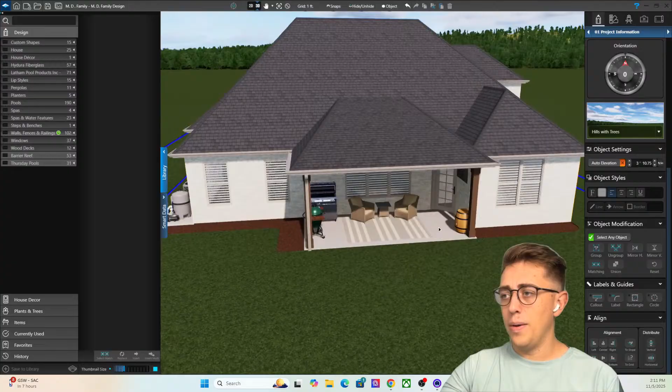So let's jump into it and I'll kind of show you what we have going on. So right here, immediately you can see is a big house. It's a very nice house. This is a project I'm doing for a family, and right now this is all that they have in their backyard space. It is a small, tiny patio, and they've got a nice, massive, big home.

This is the 3D view of our modeling software. I've duplicated the houses next to it to just kind of simulate the neighbors' houses.

So we're operating off of this idea of, okay, this is our client's home. These blue lines are the property line on the outside. The inside is not the minimum building setback, but it's a public utility and drainage easement. This means, especially inside of developments, you need to have a certain amount of green space in between properties so that water can effectively drain, and you're not just concreting the whole development and causing all of these water problems and drainage problems.

But there's plenty of green space to go around. The neighbor on their left has a full fence. The neighbor on their right does not. And that's going to be an important thing to note when we get to this design as well.

So before we get too far in, we're going to jump into our 2D plan here. And we're going to pull up our client overview, the Johnson's family. This isn't their actual name, but we're going to call them the Johnsons for now.

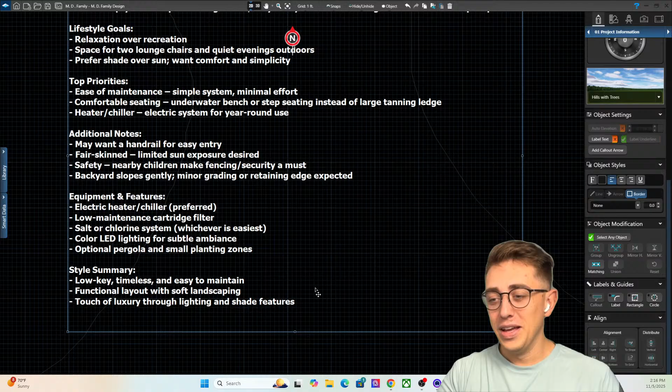Once again, equipment features that they want, and just the style summary - they want to keep things low key, timeless. They're not looking for anything that makes a huge point, but his wife did say she wanted like 25% pizzazz. I don't know what that means, but we're going to help get that for them. 25% pizzazz, here we come.

And so this is the Johnson family. We will refer back to this plenty of times during the build.

Going back to here, you can kind of see the terrain, how it slopes down from the neighbor on the right, moving all the way over to another slope here, going down to the neighbor on their left. Their neighbor on the left does actually have a pool over here, and so privacy is a big issue here. There's no trees, there's nothing actually separating these two homes from seeing each other. So we may want to keep privacy as part of the conversation here.

The first place we start on every project is the layout. We're going to work on the layout of this project. We want things to flow, we want things to feel balanced, we want things to feel symmetrical and on purpose. We want this backyard space to feel like it was designed along with their home - like it's a part of their home. It's the outdoor living part.

I think a lot of families underestimate the actual value behind building out their outdoor space, because when they think living space, they think indoors. And I promise you, once you build something of value behind your home and start working on the outdoor living portions of your property, you will spend more time outside. You will start living outside more than you would on the inside of your property if you do it right. Now, weather is also a thing.

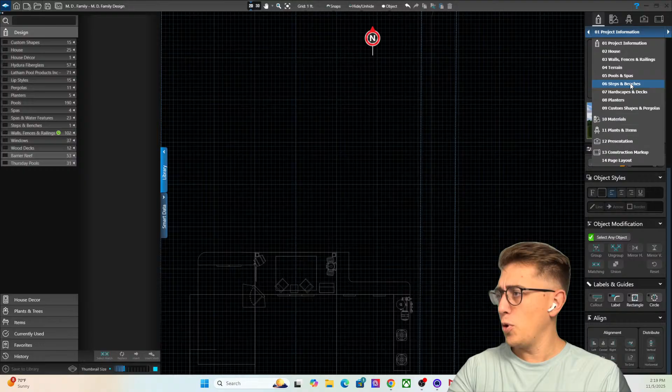So with that in mind, let's get designing. Jump into our 2D here. Whenever I start designing, especially when we're talking about pools being on a budget, I'm going to first put the pool in that they were looking at. The pool they were most interested in was the Olympia 14. However, since there's only two of them, I'm going to see if there's a smaller model.

And there is - there's an Olympian 12, or an Olympia 12.

I'm going to look for this 14 here so we can see kind of the difference in sizing. All right, so you can kind of see the difference in sizing here. You're losing about 2 feet on the sides and about 4 feet on the end, which is a big difference, and it's not a big difference at the same time.

When you're talking pools, you really want to start with how many people are going to be in the pool at one given time. Do you have young kids? Do you have a lot of young adults? Are you a partier? Are you wanting to host a lot? Do you have a huge family with a lot of grandkids? Or what's the max capacity of people you're going to typically have in this pool at once?

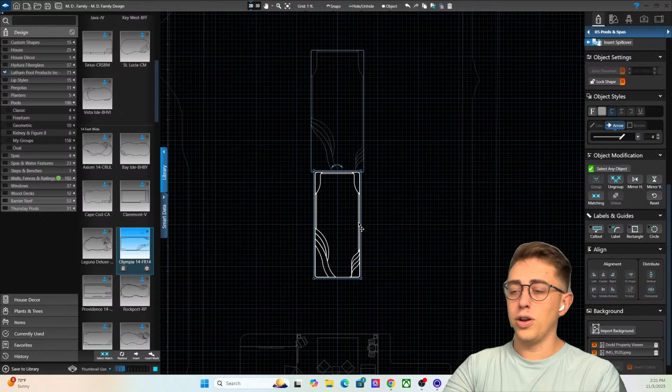I want to ask you a question: when was the last time you were in a pool with a lot of people and thought to yourself, this is a small pool? It's rare. People don't think about the size of the pool hardly ever. They are thinking about how much fun they're having and just being grateful to cool off in the backyard. So size of the pool will be important to meet needs. If you've got teenagers and just kids being crazy, and you're wanting to relax and lounge, then maybe you want to go with a bigger pool. That way you can sit on one end and relax and get your crazy kids on the other end.

So here is the Olympia 14, and I'll jump into our 2D here. Take off waterline tile, take off coping with fiberglass. This is a fiberglass pool, by the way. Fiberglass, you don't do any waterline tile, which is what you would see on custom shotcrete pools. It's the waterline, it's the tile that runs right below the coping. This is the coping here.

And you can kind of see how this lines up with their family's back porch. We'll bring it in to a little bit closer here.

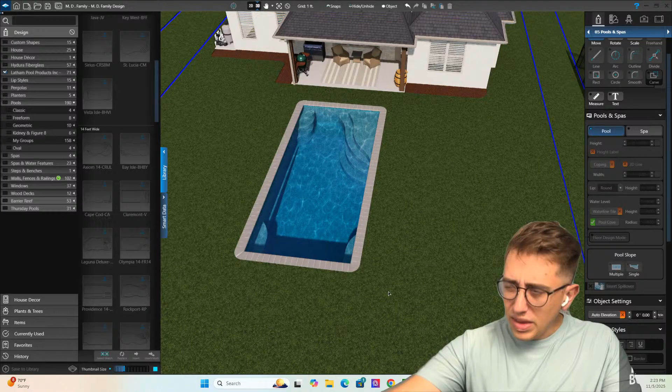Your pool model is going to be the biggest factor as it relates to cost savings. There are some things, luckily, with this family, we're not having to deal with as much, and that would be like elevation. In the event this was being built on a slope, we would have to integrate some retaining wall. Thankfully this family does not have to integrate any kind of land retaining wall, any kind of maneuvering soils or anything like that. It's simply just dig a hole and haul it away. So that in itself, having a flat yard, is one of the biggest advantages to saving money.

All right, now that we've got our pool, we're going to move on to the next thing, which is going to be the hardscape. Now when we are talking design, layout, functionality, we do want to keep things as symmetrical as possible and keep layout in mind here. So I'm just going to throw a rectangle out for now.

As you can see, it's framed up very nicely with this middle window here. If they're inside eating dinner, drinking their coffee, it's cold outside, it's snowing outside, they don't want to go outside, but they can still enjoy their pool from inside by looking at it. So that's why we want to accurately mark where all the windows are. This is their master in this far right corner, their kitchen's on the right, their bedroom's on the far left. And then this is like their living space. So this is perfectly in line with their inside viewing.

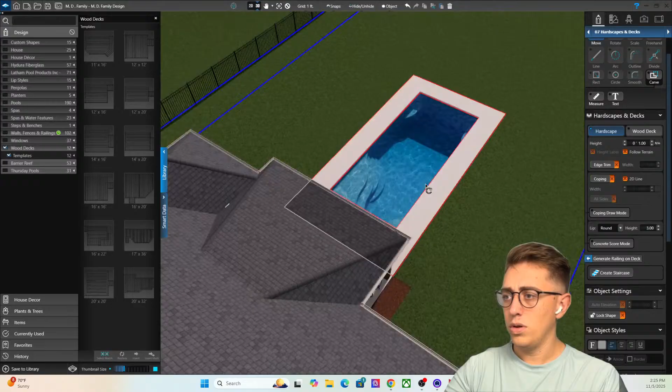Okay, I think we're going to move forward with this location here. In fact, we may be able to, let's just see what it looks like to pull the concrete all the way to the patio. This provides, I'm kind of liking this because it does provide a lot of space in the front of the pool for traveling, for just moving, if they wanted to throw some chairs up right here or finish putting chairs on this rug area to kind of bring in some more of the conversation. There's plenty of space here to add and subtract any kind of elements that they want to integrate or move.

Typically, we would do what's called just like a planter strip running from an existing slab to the new pool deck area. So we would do something like this.

And we would bring the planter strip into these two areas and put some plants in, and that separates the two spaces. Planter strips, sidewalks, flower beds, retaining walls—these are like ways of putting a rug into a space like this. It helps define spaces.

Just like how, when we're looking at this backyard, this is how they've already got set up. This rug right here is telling you this is the seating area, not the cooking area. The cooking area is over here, and this is the seating area.

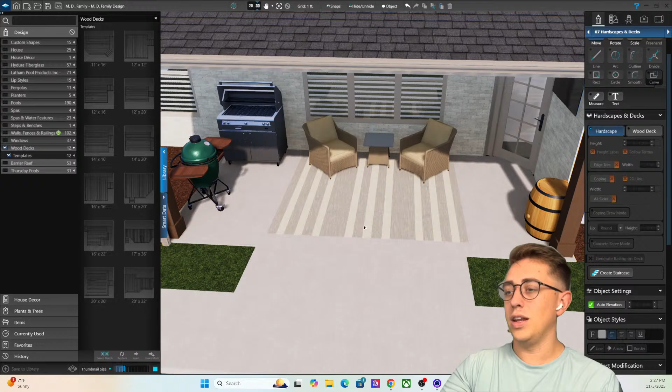So just like how we use outdoor rugs to tell you what a space does, we do the same thing with planter strips. We can separate two spaces just by adding a little pathway—take this planter strip, bring it up here, divide it, bring this up. I'm pulling this planter strip in so you can see what I'm talking about as it relates to providing more separation here. Especially once we add plants, this kind of makes it feel like you're experiencing the backyard, and that's an important thing.

Yeah, so you're experiencing the backyard, and one of my goals is to create a space where you really feel like it's a story. So creating these two separations can be helpful.

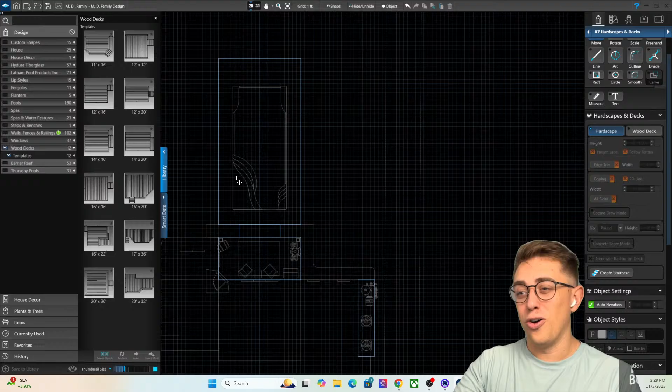I do remember her saying, when we were on site, that her neighbor has a pool with a ton of concrete around it, and it's all connected, so it kind of feels like a parking lot. We don't want our designs to feel like parking lots. We want them to feel like you're walking through the woods and you find this little piece of paradise that no one knows about, and it's all yours. That's the hope—that we can give that to families.

So right here, let's decide on this pathway. I think because we're keeping cost in mind, let's for now just keep it connected. We'll keep about 6 feet of space in between the pool and the existing structure—so that's about 6 feet.

And I know that they do want some lounging space. They want to be able to sit and enjoy—I think they said one or two lounge chairs—and they wanted some in-pool seating. Let's go back here. All right, top priorities: maintenance, and underwater benches or steps instead of large tanning ledges. This definitely satisfies that—there's plenty of in-pool seating.

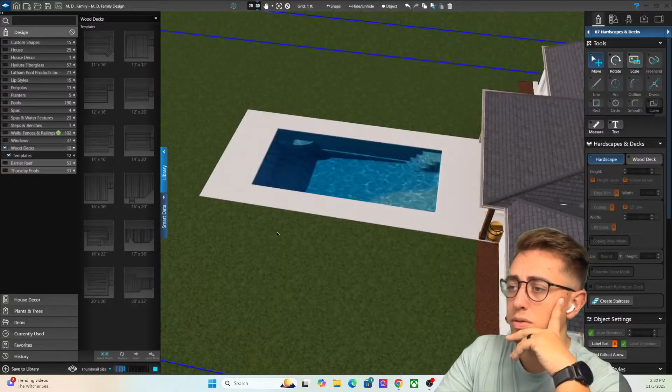Okay, next would be: they prefer shade over sun. So let's jump back into our 3D here. Now they've got shade here, so this does provide a lot of shade, and they can sit out here in their chairs and enjoy the pool from underneath their back patio.

But is that enough? Is this what the lounging space would be? Would the lounge chairs be over here, or are we thinking it would be in another spot?

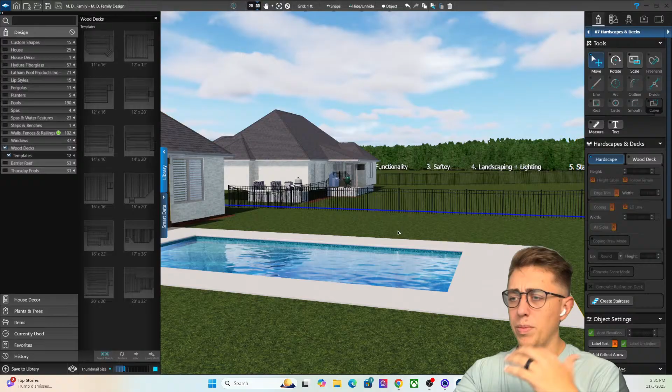We also need to consider the neighbors as well. If we put the lounge chairs on this side of the pool, you've got your next door neighbors kind of looking down on you and can see everything going on in your backyard area. Now if we put the pool chairs on this side, it's less invasive, I guess you could say. Their house, our client's house, is sitting up higher than this neighbor's house, so it's going to be a little bit harder for their neighbors to look into their property. So I'd say for sunbathing purposes, because of where the sun is and where their neighbors are, we should put the tanning and lounge space on the right side of the pool here.

You know what? I'm actually going to look up prefabricated pavilions and see what dimensions are for these things. Something like that is nice. This is nice. Let's go to shop and see shopping.

14 by 16, 14 by 16, 14 by 18. It's kind of nice. 12 by 24, 14 by 28.

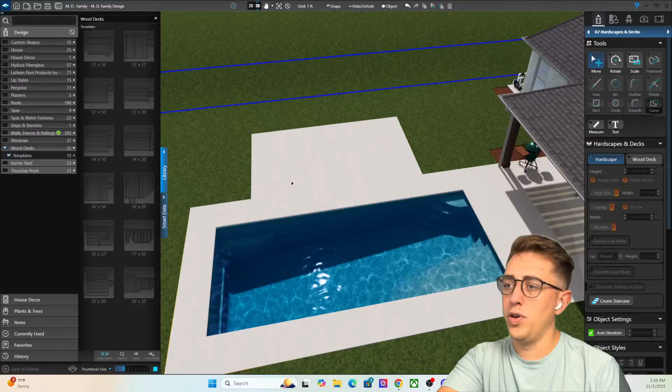So we're gonna go 12 by 20 just to kind of provide some space here. And I need to measure this, that way I can just kind of see where center is. So I'm trying to center the pavilion with the pool.

Now, is 12 by 20 too big? I think it might be too big for this family. Let's reevaluate here, because now I'm thinking it's mainly the two of them. We could do a portion covered and then a portion uncovered as well, in the event that they wanted to pull their chairs out from underneath the covering, they could.

So it was like a 12 by 16. So you're going to find 8, 10, 12, 14, 16. You're not going to really find odd stuff like 13 and 15 — those are pretty uncommon. Most of the lumber you're going to be buying is in 8 foot, 12 foot, 16 foot sections. So we're going to bring this down to 16. We'll go 16.

12 by 16, and something like this. Super nice. Yeah, I mean they've even got it next to a pool. That's perfect. So, 12 by 16, all cedar. This is a good deal, and it's got a spot for power. That's great.

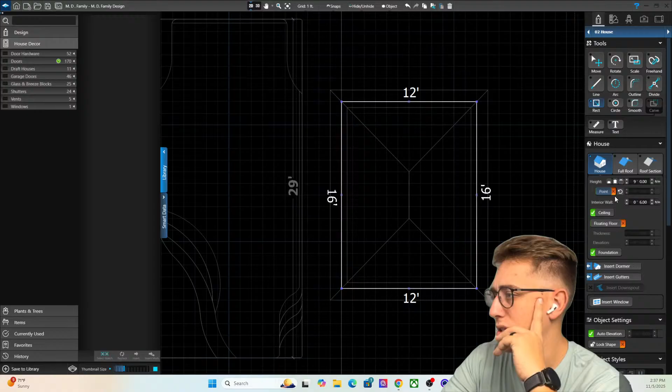So we're gonna roll with this. We'll make this their covering. And what we'll do is we're gonna go ahead and build this for them — 12 by 16, we're gonna make it just the roof. And we're gonna pull this roof up here. See, jump back in here. It's got 2 gable ends, no gutters, no ceiling. That's kind of open there.

Let's go up here, go roof, gable this, gable that, and that's looking pretty good. We're gonna bring this down. The actual roof line is the 12 by 16 — so it says 10 by 14, but the actual roof line, like the envelope of the roof, is the 12 by 16.

And so this is nice because it also is going to bring some shade into the pool. Yeah, I'm actually liking this. This is good. All right, let's see how tall this is. Max, it's 10 feet tall. To the roof line, it's 7 feet.

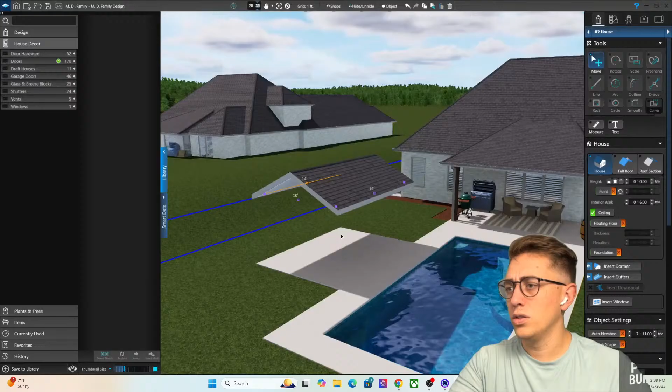So we're gonna jump in here and we're gonna measure. We're gonna measure from... okay, that's not exact, but we do need to drop this like a foot. Let's get the measurements right there. All right, so that's 7 foot.

And they've got this kind of dark wood. I'm sure that they could stain this that same color or keep it. They've got this whiskey barrel. It's kind of nice.

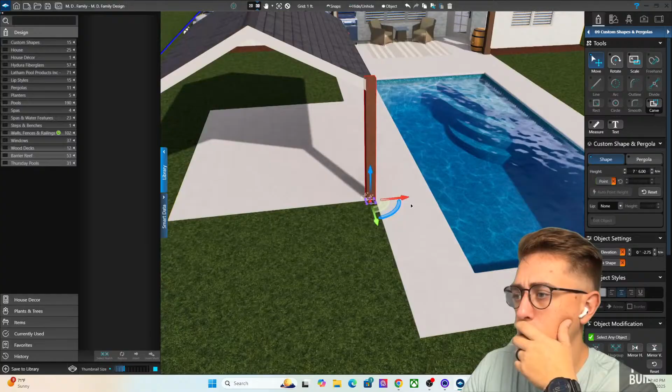All right, so we're going to go into custom shapes here, and what I'm going to do is just recreate this structure. This is 7 feet tall — we'll just go 7.6. And we're going to pull this down into here, and pull this out to something like this. Pull it in, pull it down, pull it in. Something like that. Looks great. And we're just going to copy it and pull it over here.

Just copying, pasting, building this out. We will eventually start working with some of the materials on this, because I know the roof is not a shingle roof on this pavilion — it's a metal roof. And all those little details do matter.

So that looks nice, we're going to pull this over. We're just trying to recreate something similar to this. I'm not going to go as detailed as matching this same canter, but we're just going to do something very basic, very similar to this, and see how that goes.

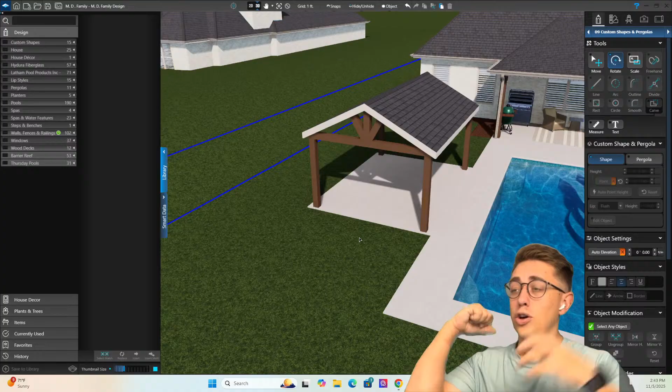It's all about creating the vision for the family. I might say, oh, we can put a pergola on this side of the property, but they may be thinking pavilion, or something without a roof, or a carport. Being able to design and build it, even though this isn't what we're building or selling, helps them see the vision for the pool space.

The pool is already in the ground, that's what we do. But to show the vision for what this place could be, you do have to build it out. That's a big part of how families get pools in their backyard - they say, I don't need everything all at once. I don't need the pavilion, I don't need all the landscaping or flower beds. I'm going to start with what's most important and most expensive, get that in first, then focus on the other pieces.

But your pool needs to be designed in preparation for those things down the road. You don't want to put a pool in a spot where you're planning a pavilion or flower bed, and then get to that time and think, dang, I wish that pool was a little over to the left so I could put a structure there.

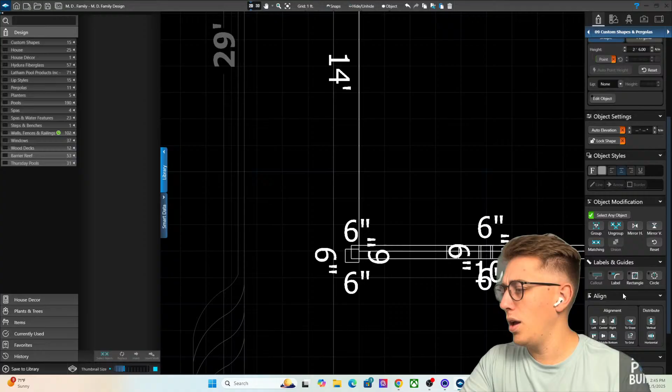I think this is nice. Now what we're going to do is select all this, and deselect the concrete. Boom. Wait, is that the concrete? Yeah, that's the concrete. We're going to group it together, and merge the concrete with this. So this is all one. All right, looks good. Looks super good.

Now where do we go from here? Do we want to play with this possible landscaping strip in the front? We could do one strip in the middle, or two strips with a little fun planter bed in the center. I don't know, the more I'm looking at it, the more it makes sense to just have everything together, and find a way to define more spaces.

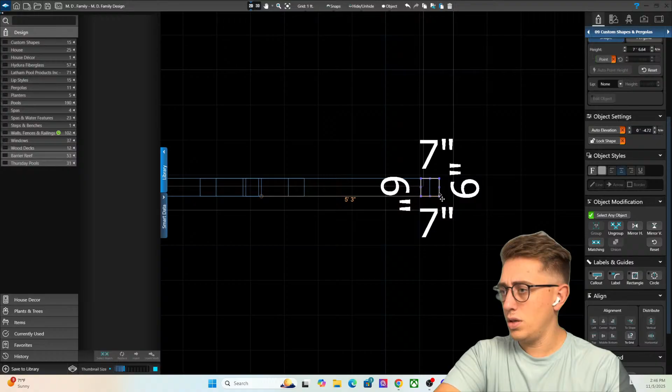Like this is a defining structure. This tells you very clearly, oh, this is where you sit, this is where you hang out and get out of the sun. It's very defining. And we're gonna take this, group this all back.

All right, I think we've got the structure and the layout, so the layout's done. The next thing is functionality. We've already been focusing on functionality with this defining space, but the functionality part is always going to be important as it relates to everything, whether it's staging, layout, or pool type.

I'm even thinking about how I wish these stairs were on this other side, to create an easier in and out from the lounging area. Now, it does have some really nice entry steps right here, which is a huge advantage. And there's also an advantage to having the pool steps or major steps on this side, because you can be sitting on these big steps and feel like you're still participating in what's happening underneath the pavilion.

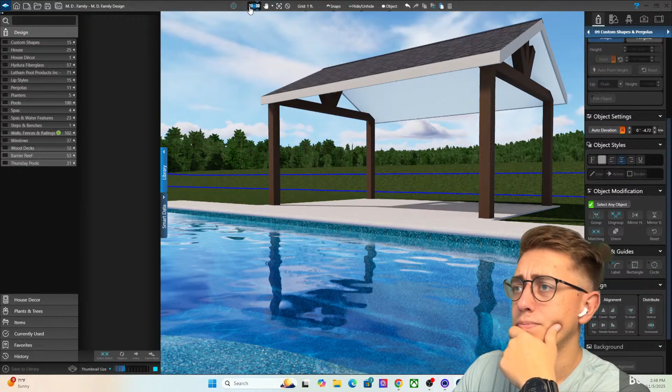All right, what's next? Safety. Safety is the next part of this conversation. And when I say safety, I mean safety for the homeowner and safety from the neighbors.

So by law, you are required to have a 4 foot barrier to your pool space. And they've got a pretty decent sized yard. Now the advantage to this is their neighbor already has a fence in place, and so we can tap into this. Let me start here.

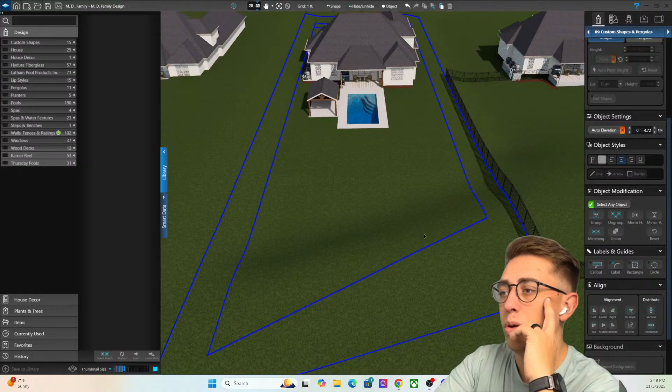We've got two options. We can fence in just the pool area, which is going to be more affordable. Or they can decide to fence in their whole property like their neighbor has done, which would be an advantage because now you're including your full space and get to use the full length of their fence as a barrier. We'd connect here, pull out this way, and run down these two lengths. It would be a bit more of an investment, but you don't block yourself off from the rest of the yard. You don't want to make your yard feel smaller - you want it to feel expansive, which is rare nowadays when it comes to people's properties.

So let's go ahead and build a fence.

We're gonna go here to here, and come off 3 feet from here. Go 6 foot. We can actually go to their property line and then come up all the way and just kind of run at an angle here and call it a day.

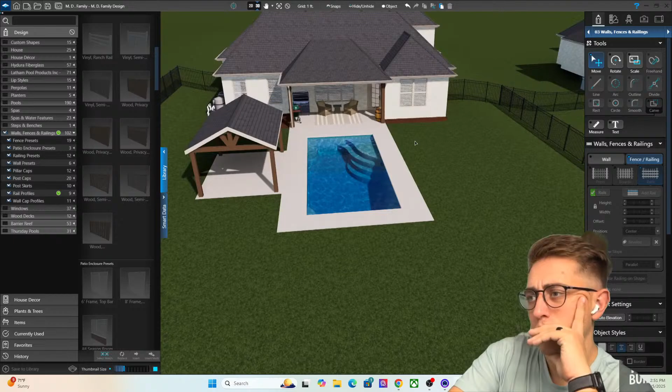Now, when we're talking railings going into the pool, we have two different types you can choose. You can choose a metal handrail, which is great—it's your most traditional pool handrail. It needs to be bonded to the pool area and equipment because it reduces the risk of electric shock. The other option is a composite handrail. The composite ones can be added down the road, but all the metal ones need to be decided and installed at time of construction.

And I think we've got more in here somewhere. Hmm, I can't find it.

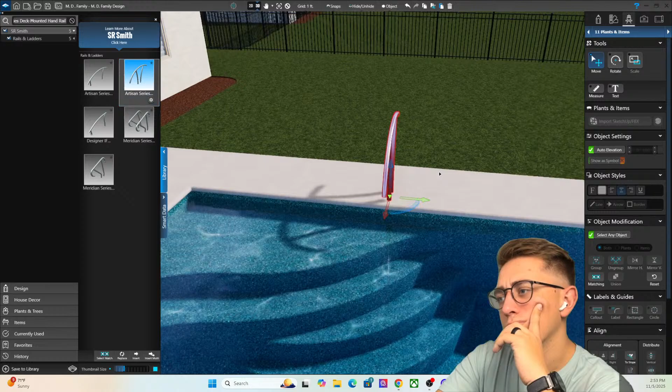So a lot of people are doing something like this, something that helps you get up and out of the pool, or you can move it to this other side here and make it a bit more accessible, but it would block off some of your pool space or walk space.

One thing that's nice about these that have the curves on the end is you can actually hold on to the hook part and get in and out of the pool.

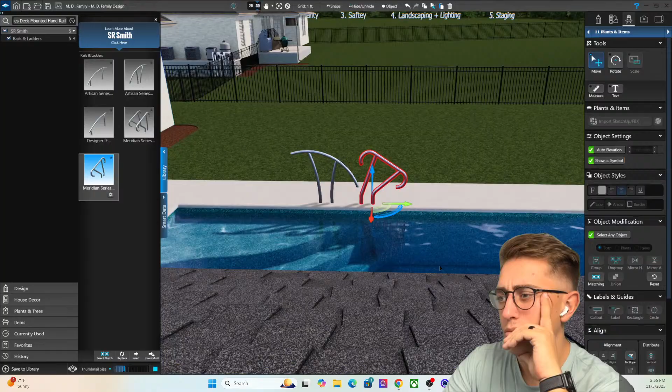All right, so safety is marked off. Now we're moving on to landscape and lighting. Landscape is a huge part of this conversation. It's one of the most important, in my opinion, because it brings the space to life.

We've got some main planter strip areas that should be considered. One is this one right here in front of their bedroom window, and then they've got one in front of their kitchen window here.

Keeping it more budget friendly, you would want to keep the planter strips down because you don't want to plant too much. It's just cost—it's more cost to everything.

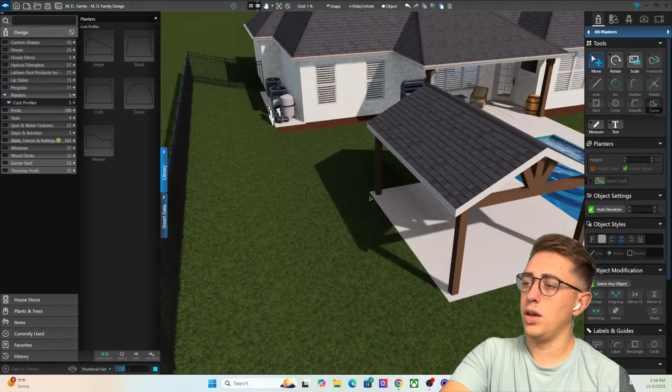Now, like I remember saying, this family can look down on their property and see them, so we may want to integrate some privacy plants along this railing here or along the backside of the shade.

Let's see. Panels. Yeah, like a decorative panel, something like this. But I don't want it to be too noisy. Leaves, diamond, burst, blocks, bubbles, flame.

I think I kind of like this one, maybe? What does this even look like? Oh, that's kind of nice. I'm sure that they can put something like this on the backside of their space, just to help with privacy.

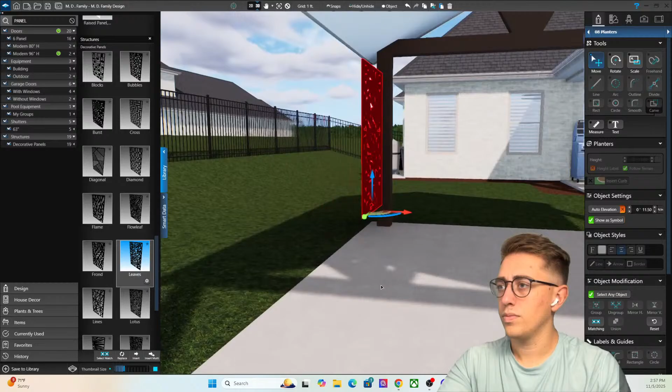It's nice too. Retro, nice. That's kind of nice, but I don't think it's them. I think it's this right here—this, to me, is them.

So I'm just going to select all these, and we're going to bring them in here.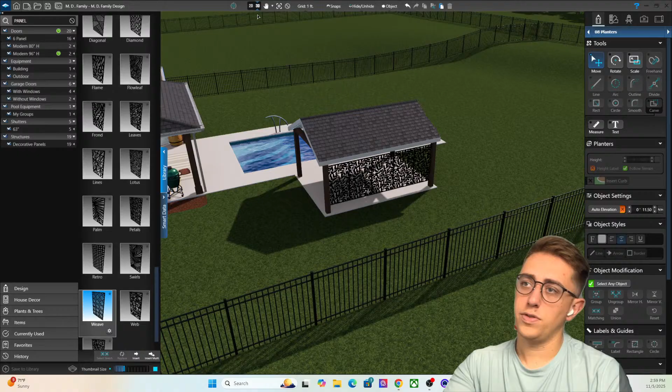I like that—it doesn't make you feel too closed off, and we don't need to plant super massive bushes over here, but it could be advantageous for us to almost wrap this around still, like this. Bring this in to here, and we're going to divide it here, divide it here, bring this in, and pull this in here, pull this out.

This is a more private part of their home, so I don't want to make this a seating space necessarily, but I do feel like it's kind of asking for something. I don't think we have to add anything there, but it does seem like it would be a good spot for a fire pit area or something. Maybe they could expand their outdoor kitchen into the space.

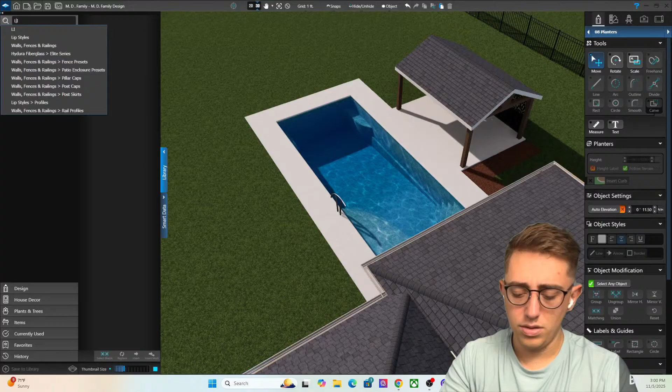All right, mainly with lighting here. Let's jump into the lighting, and we're gonna add some pool lights.

Pool lights are always a foot below, and for some pools, it's either a pool that has one light, two lights, or three lights. It all just depends. They are color changing, so you can see them get lit up here. We want them to face away from the house, that way you don't have lights shining into your home.

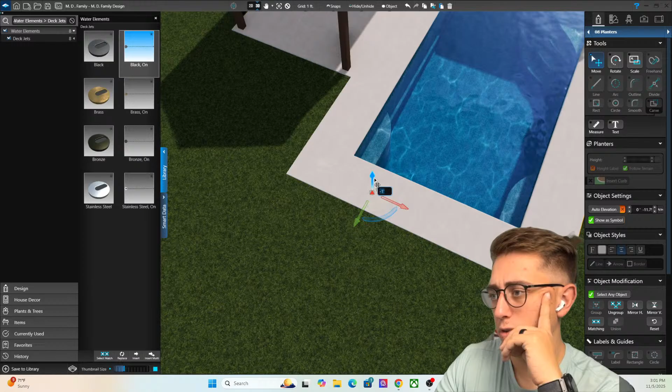Now, she did say she wanted a little bit more pizzazz, so let's go ahead and integrate some deck jets here. Deck jets are super cool, a super fun way to bring a water element into your project at a pretty affordable price. Yeah, that's nice.

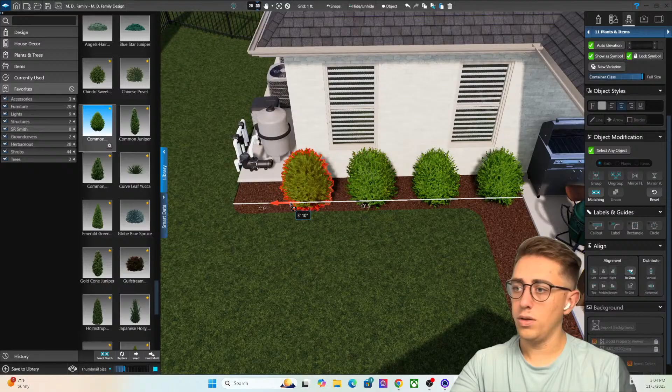And we can add some plants in here. Boxwood is a good, very common, affordable plant. We're gonna go with 5, bring this in here, select all of these and space them out accordingly. We'll push them in a tad. That's good. And we'll do the same on this side.

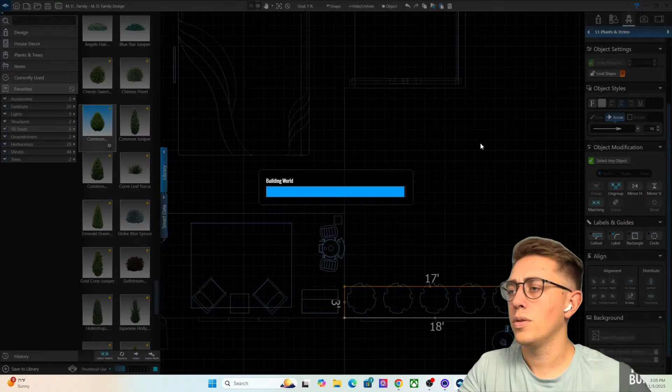Now the question is, do we need anything here? Maybe we just put plants on, we leave this whole space open and then just put plants next to the pergola or pavilion, like this. I like it. Then we'll go planter strip, jump into our 2D here, and we're gonna do just two planter strips, one on each side of this pavilion. And this will kind of box in this space a little bit better.

And I really like these Japanese hollies. They're pretty popular here in Tennessee. They're not super big, not super thick and luscious, but they once again help define the space, and they look really cool lit up, and they can cast some really cool shadows if done properly.

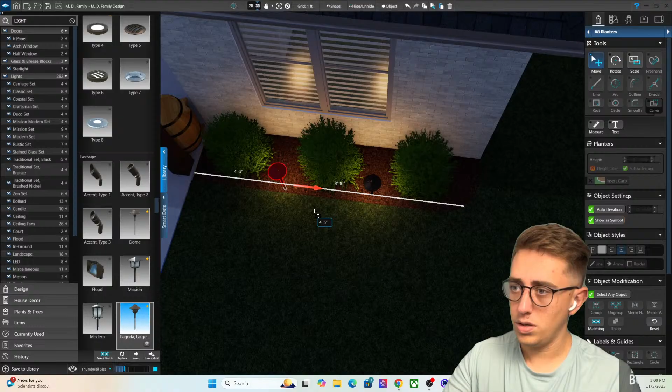So maybe we go with something like this. That is super nice. I think these are technically like path lights, but it keeps all the light usage just kind of down. I don't want to be blinding these people in their home.

Looks nice. And maybe we do something similar here. Pull this over here. Now, I'm going to be shocked if they don't have some kind of lighting up underneath here. So I'm going to find just like a basic ceiling fan with a light and plug it in here, because I'm pretty sure that they've got a ceiling fan in here. I could be wrong, but most newer homes now have some kind of ceiling fan for light.

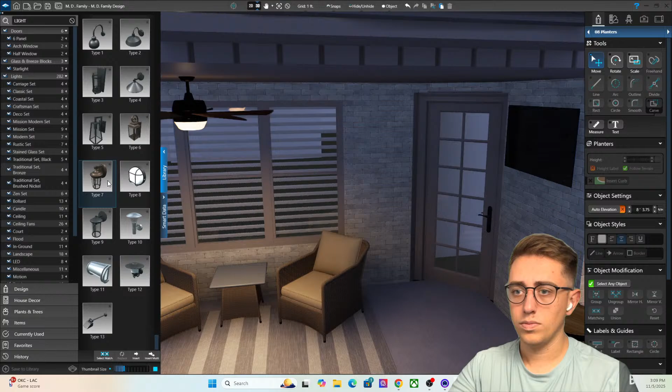Let's talk landscape lighting back here on these plants, the Japanese hollies. We may have to go with the same kind of lantern vibes.

When we're doing lighting, I'm thinking about a couple things, and one is always, what is this illuminating, and then what is this kind of shading? So I want to definitely keep that in mind when integrating these lights.

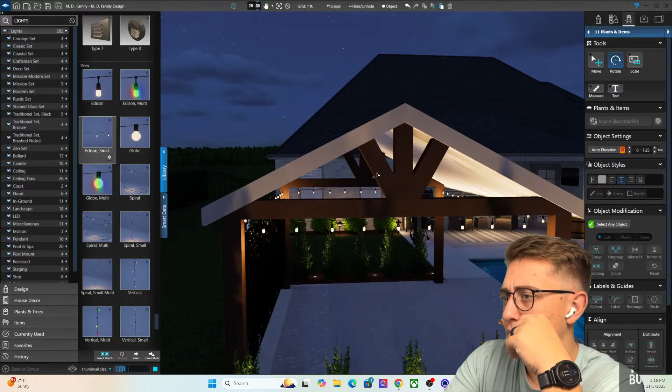Hmm, I don't know, I kind of like it. Does that just make it feel more complete? I wonder. It might feel too bright underneath there, but we can adjust the materials on the inside to make it not seem so. So let's just leave it like that for now. I think it looks really neat in the dusk. I think that's really going to be attractive to them.

All right, so now that we've got lighting and plants figured out, we are moving on to staging. Staging is probably one of my favorite parts of it. You get to drag and drop a lot of really cool items, furniture, whatever it is. You can just plug it in and let your creativity flow. So let's jump into items here, go to furniture, and start building this out here.

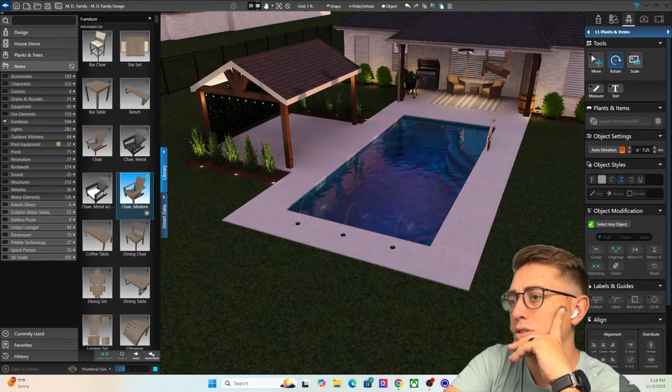So these chairs are always a hit, everybody loves these chairs here, and these chairs could go great at the end. Or we could add concrete down here and put these chairs down here. How much concrete do we have? 575. I probably don't want to add any, I want to stay underneath 600 for sure.

But they said maybe 2 lounge chairs, so let's see where these lounge chairs could go. Just keep this somewhere for now, put them in the grass. Lounge chairs, got a couple options. This is already kind of like their dark wood tone aesthetic, so they may like that, but I also want to give them a lounge chair that's a little bit easier to get in and out of. Let's see if I can find one.

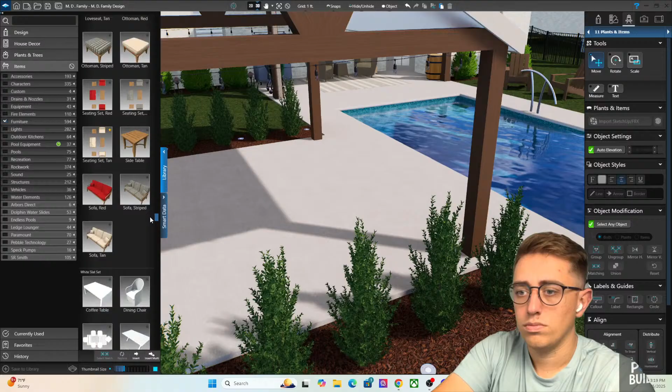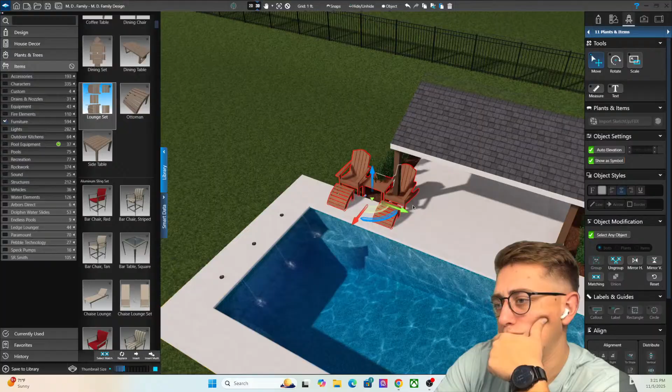Here we go. Let's see, how should we design this? I'm trying to find a specific lounge chair here. This is the one that I'm looking for.

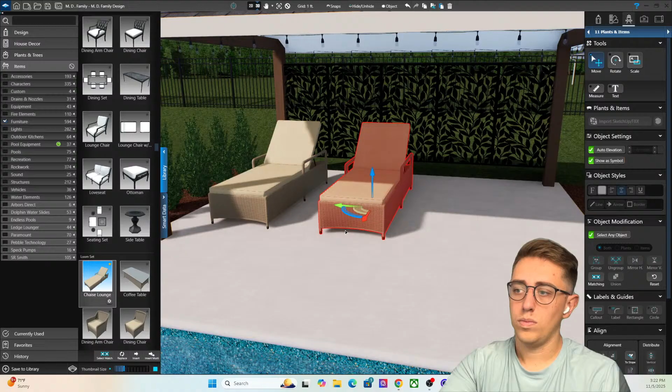I mean, they could do 3 full lounges underneath here if they wanted, or they do 2 and they put in like some kind of seat or table for eating underneath here if they wanted. It's actually a good idea. Let's see if we can find, there's a table and chairs.

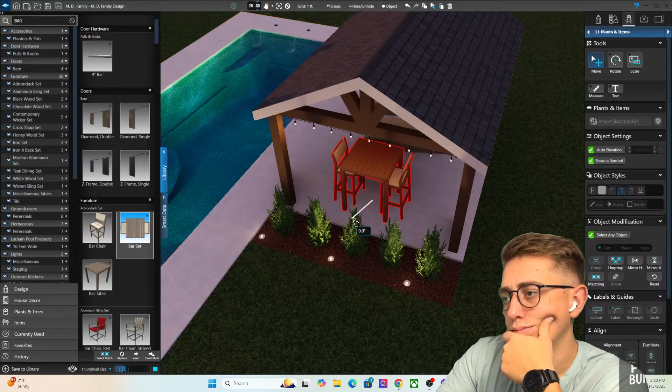Almost like a bar table, bar table height, bar table. Hmm, they may not be bar height type people, they might be just table people.

Ooh, a fire pit area actually underneath there could be kind of cool. I just don't know if there's enough space. I don't want this to feel cramped underneath here.

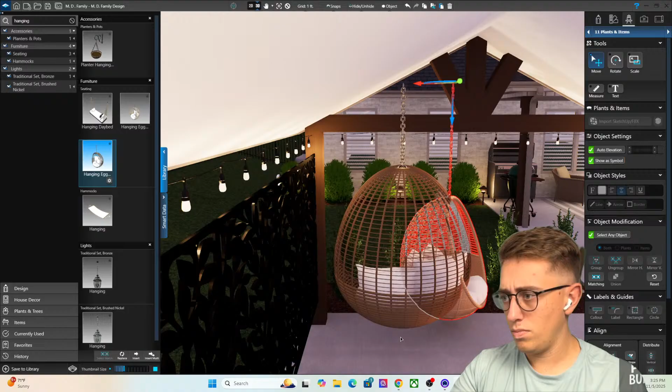Ooh, you know what, they've got some hanging chairs that are actually super neat. I don't know if that's a good idea or not, but almost something like this, it won't take up too much space. It's a bit nicer, but it's a little too big. It's a little too small.

Delete, bring this down. Still too big? I don't know. This is kind of nice because it does. Let's bring this, is it too much? That's the question. Let's see what that does for the space. I mean, that's kind of nice.

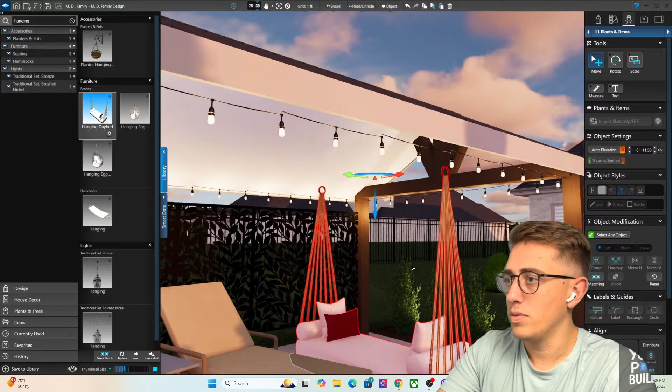Or hanging daybed, that could actually be fire. Let's see what this even looks like. I don't know, is this too much? Could be too much.

I'm really struggling with what to put in there. I think I might go back to the hanging chairs, the eggs. They do kind of add some privacy. Maybe we just do one.

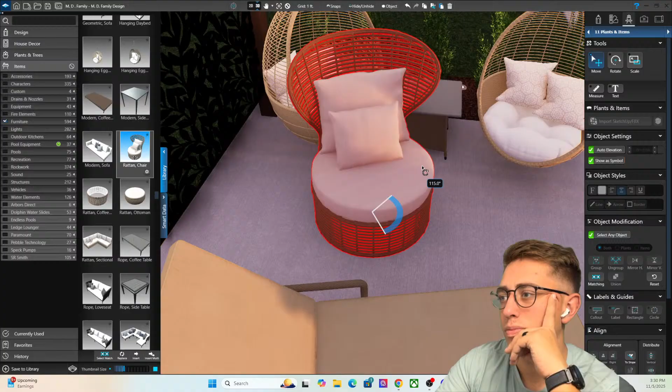Is this a bad idea to put a table near the swinging chairs? I think I'd swing into it and knock it over. Decisions, decisions. Is that better?

I almost think this is better. I honestly have not even seen this before. But what I like about this furniture is it kind of helps with the privacy too.

Side tables, find one that fits. All these little details matter, they really do. Some color, like put some color in here.

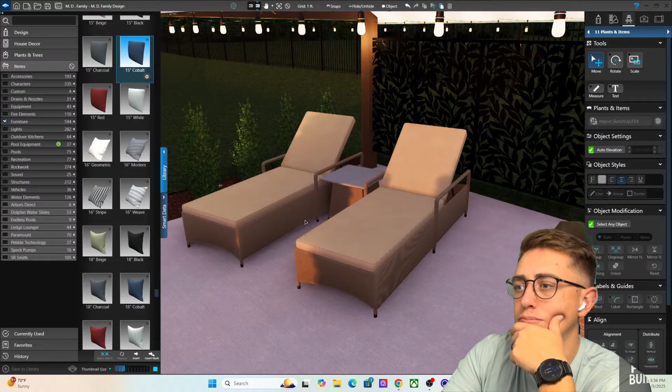All right, so what's next? What's next? Okay, curtains, that's what I was doing. Pillows are also another big thing, integrating some color is always helpful. They do kind of strike me more as a red, white, red maybe, it's kind of nice.

Rotate this thing back. Boom, boom, boom, boom, boom, boom. Like that, we'll do another one on this one. Just like that, looks good.

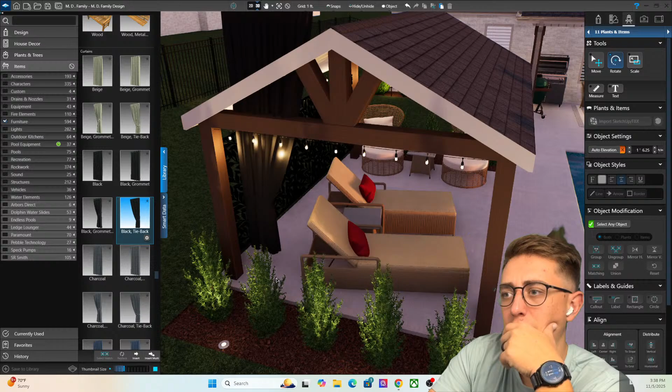White, beige. Is beige the move or is black the move? Black, blue, red. Ugh, kind of risky I feel like. Is this too risky? Let's take it down, 85. Still kind of risky, I don't know. 80?

Okay, the smaller it gets, the better I feel. It's not as overwhelmingly there, I guess you could say.

The lights, be on the inside or the outside? I guess the lights would be on the inside, right?

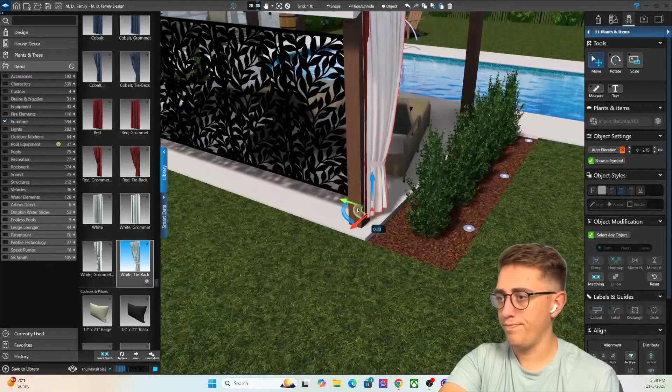I might be doing too much. All right, so I think we are just about done. Let's take these chairs, delete these. I really like this space, I think this fits their needs well. Let's see if we can figure out a way to, I don't know, should we figure out a way to get the decking down a little bit more? Let's bring this, let's bring this other pool back in. I mean, this is definitely the move. I feel like we've found a really great option for them.

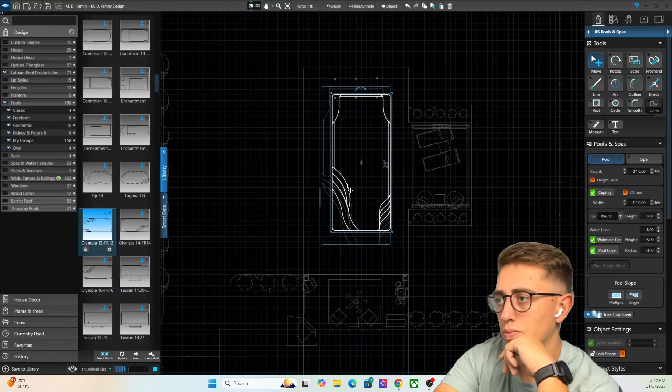All right, we need to work with the materials now. Let's jump back in here and find our roof option. What kind of roof is this? We ultimately get to pick, but it looks like it's just a traditional shingle roof. I know there are some roofs out there you can go with, like a standing seam metal. We'll do this as the same.

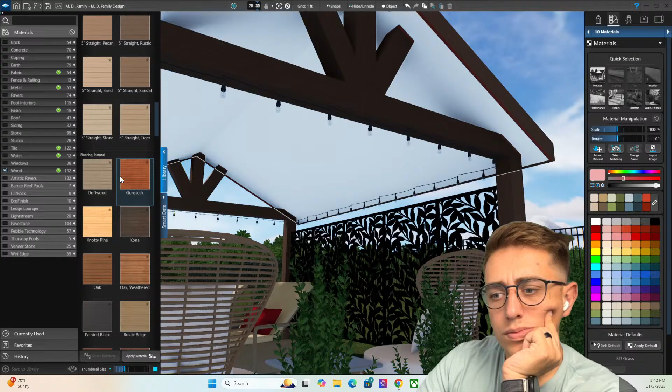And with this, let's go to wood. We'll see if we can find some tongue and groove for the ceiling. Ooh, that's actually kind of really nice. Ooh, yeah, that looks good. Okay, hold on, we're cooking, here we go. I mean that looks so good. I don't know how realistic that is, but that's some warmth right there.

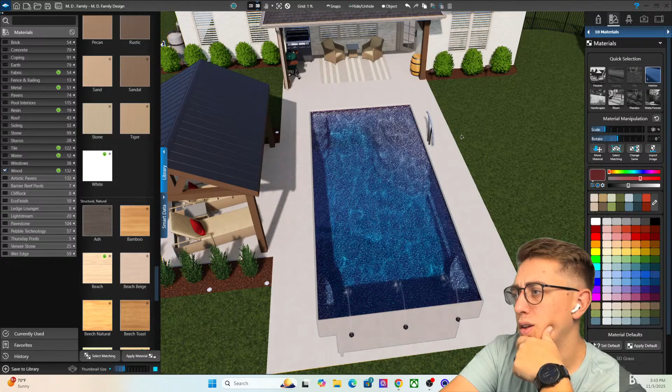All right, now to do the pool interior. We're gonna go here, and we may try like the ocean blue at 50%, which is just a nice blue color. Or sapphire blue, night sky, at 50 - just a rich, dark color.

Well, I think this is it. I think this is our design. We've pretty much checked off every box that we've set before us. We'll jump back into our 2D here and make sure we didn't miss anything.

Client overview: the Johnsons, an empty nest couple wanting a calm, easy backyard retreat with light use and minimal upkeep. I mean, if that's not the design we just built, I don't know what is.

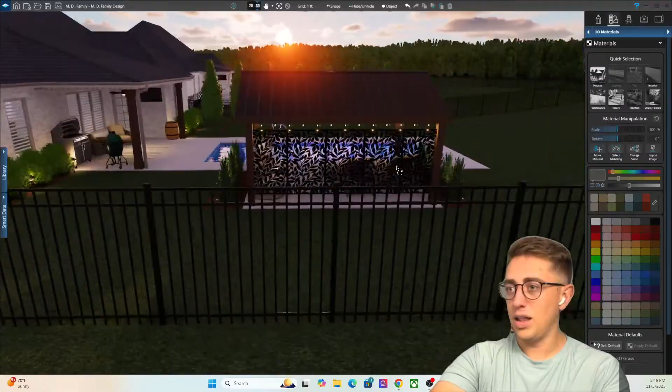Let's see. Boom, I think that's it. I love this. This is exactly what they're going to be looking for, hopefully. All right, that is it. This is how you design a pool on a budget.